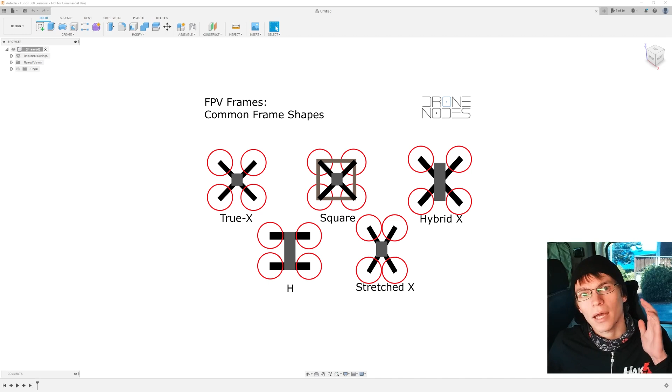So here we are in Fusion 360. First things first, we need to decide on what type of frame we want. There's a graphic on screen now from a site called Drone Nodes, and it shows square, true X, H, and all these other different drone shapes. It doesn't show the couple I'm actually interested in designing today, and that is something of a modified H. Actually, it's probably closer to an IX frame.

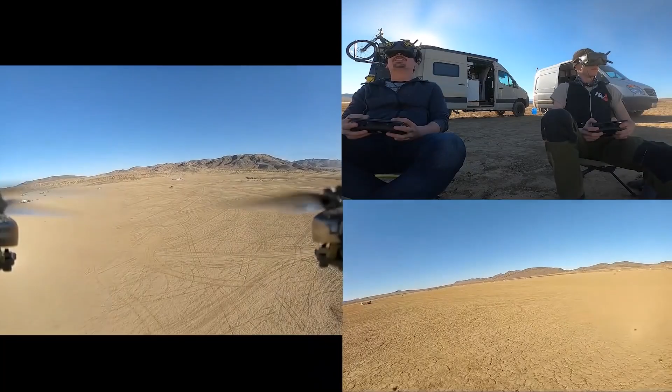Now, this design can be seen somewhat in the GEPRC Baby Croc that Darren and I did a shootout video on some time ago. You can see that here. If you look closely, it's almost straight across up top and has an X type of shape on the bottom. This allows us to mount our crossfire antennas straight across up front, and it also affects handling in some relatively good ways. The flight controller takes up a lot of the weirdness of various frame designs, so if you're wanting to try something strange, feel free, because odds are the flight controller will make it flyable.

The frame shape you choose really just comes down to what type of handling you want, and mostly personal preference. I personally really like this layout because it gives you a nice large center section to install all your parts to, with lots of room to work, and then the battery can go on top. So with the frame type chosen, we now need to figure out the distance between motors so that the props don't overlap or otherwise cause turbulence with each other. And we also need to figure out how big we want our center section to be, where all of our payload and everything's going to go.

This is going to be a relatively basic FPV drone, so we don't need a huge area. The GEPRC has a really long avionics section because it has a DJI Vista in there, as well as the flight controller, a GPS module, a high-definition camera, and all kinds of other relatively large components that we aren't dealing with. So obviously this drone's going to be a lot smaller.

One weird thing to keep in mind is the Zeus flight controller we're using is kind of meant for a 45-degree mount, which means it will be diamond shaped. If the drone's going this way, then the flight controller is going to basically be mounted like this rather than like this. You can offset this in the flight control software, which we'll get into in a couple videos from now. However, for simplicity's and reliability's sake, I'm going to mount it this way. I just wanted to make that note here because this flight controller probably wasn't ideal for this, but it's easy to get.

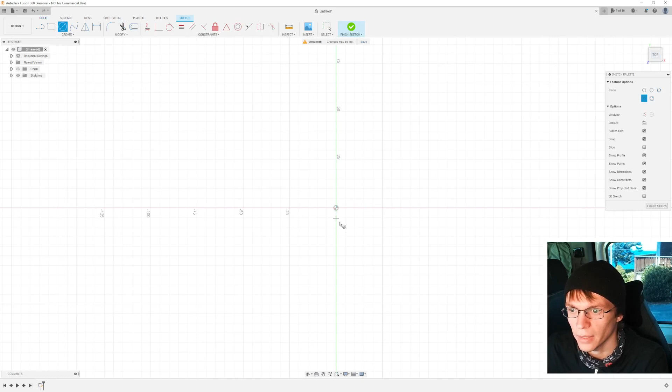In this case, these are going to be 70mm propellers. So we're going to go into our CAD program, select top here, and we're going to make a 70mm circle. And we're going to repeat that a few times for all of our props. Now we have basically the disc area of our props, and we can move those around and get a rough idea of how big our drone should be, what shape it should be, and so on.

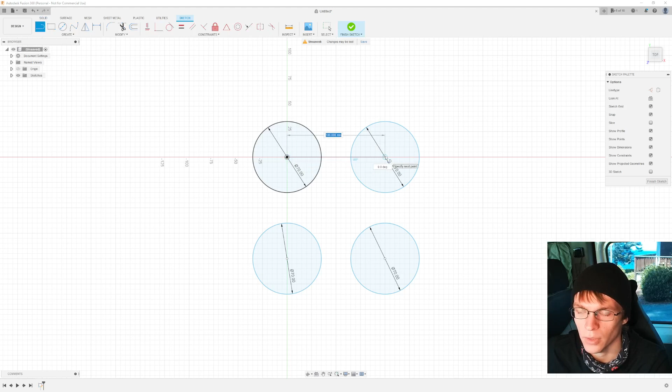Now the rule of thumb is you want roughly 1.5 prop diameters between the various center points of the motors. In this case, we have 100mm there and 100mm there. That also makes it square, which means our tuning for roll and pitch will be basically the same. Weight distribution can affect that somewhat, but with a square prop layout, we don't have more pitch authority than we do roll authority or vice versa.

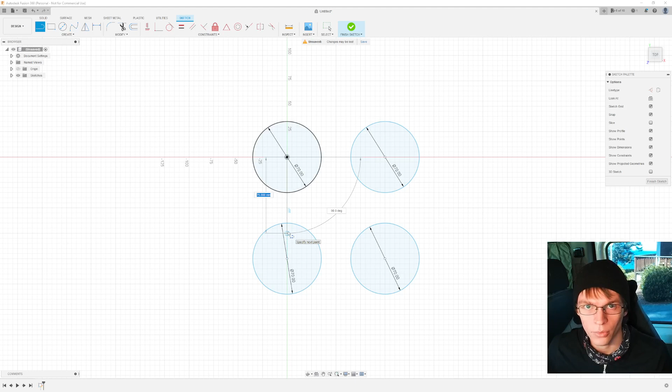It will be equal pitch and roll authority, which for beginners is a really good thing because the drone handles exactly as you'd predict it to without any extra tuning. Now, it's possible to build a longer drone that handles, you can turn down the pitch strength and so on, but that gets into a little more advanced stuff than we're looking to get into with this design.

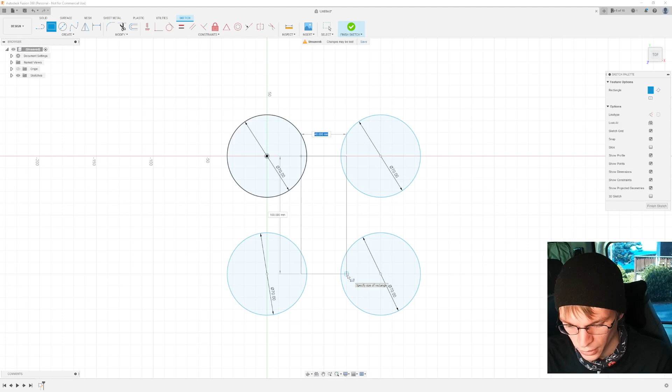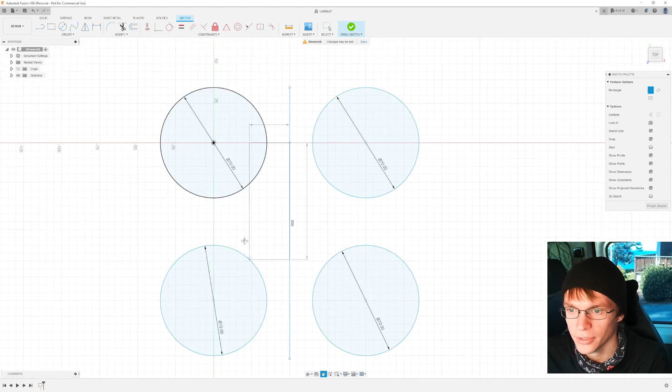Now, one trick we can actually do here to make our life a lot easier is to only design half of the drone. This saves a lot of issues with symmetry. Basically, we know we want this to be 42 millimeters wide, so I can just make this 21 millimeters wide, and then once I have the whole left side of the drone designed, I can go through and just clone the whole thing, arms and all, basically mirror it and make the other half. That way I'm doing half as much work for a full drone.

Now, it is acceptable to have the props overlapping the center chassis somewhat. This will affect your thrust output as well as cause more turbulence on the props. So for a high performance, perfectly tuned race drone, this isn't ideal. For a backyard flyer like we're designing today, it's fine. Now, you could always extend the arms another few millimeters up and out, and that would completely clear this, but it also makes the drone a bit bigger, a bit heavier, and so there are trade-offs there.

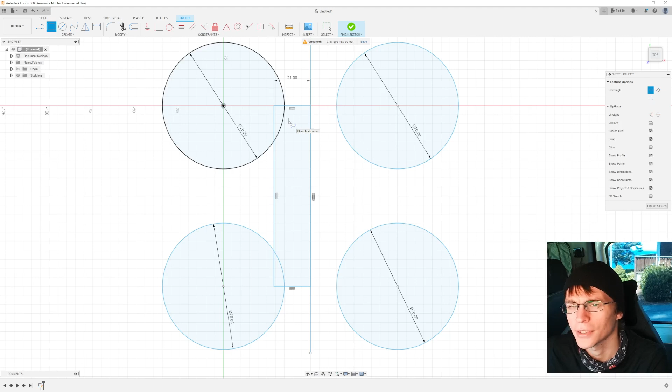Now, the next thing we want to do is make the rough layout of our arm. We know the motors have a 14 millimeter mounting foot, so I'm going to make the arms roughly 16 millimeters. Now, the great thing about the drone we're designing today is we don't have to be super worried about snapping arms from pure thrust. This drone's light enough that it could probably handle a couple of crashes too without snapping arms.

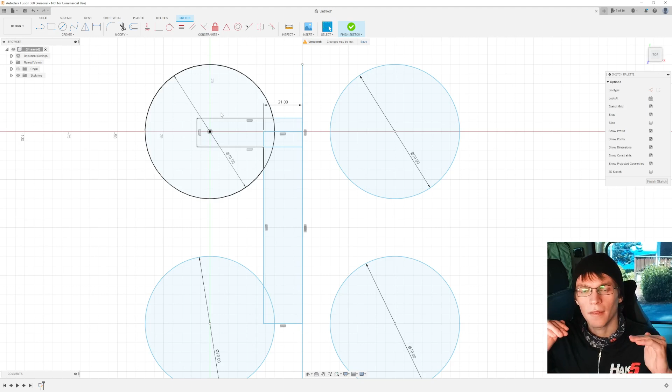However, drones I've designed in the past would actually break their arms purely from thrust because they generated A, so much thrust, and B, the center sections were so heavy that the motor basically levered the arm over and caused it to snap midair. Part of that was I was using PLA back then, and we're going to be using PETG plastic today, which is tougher, a little more flexible, and is still easy to print.

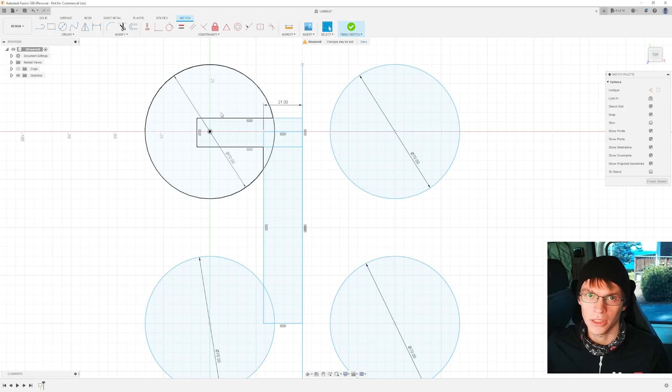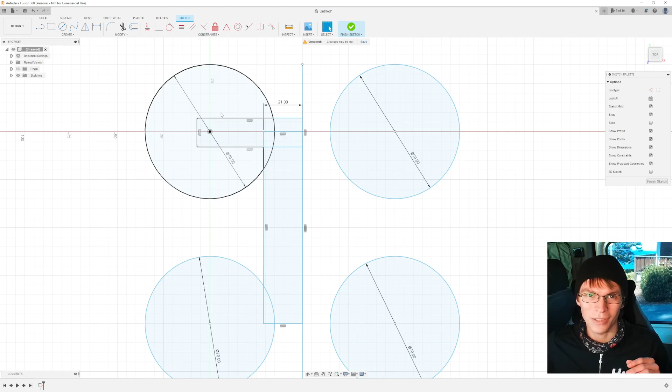ABS I found to be one of the ideal filaments for designing drones because it was fairly flexible, which sounds like a bad thing. However, for crashes and absorbing impulses like full throttle bursts, it handled a lot better and you could get away with a much thinner frame. Today, this frame's going to have to be thick enough that our screws don't go through our motor windings, which I'll touch on in a little bit. And that alone is going to provide enough strength at the voltages and thrust and everything we're running that it will make it a non-issue.

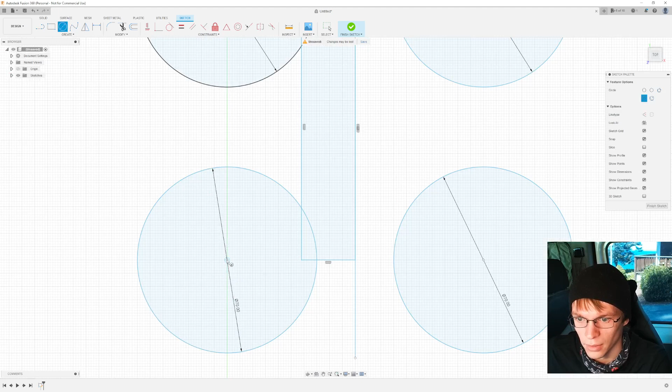We're not super worried about how thick the frame needs to be. Next thing, we're going to design our diagonal arms in the rear. This one gets a little trickier. To make my life easier, I'm going to go through here, double check this. Oh, I need to fix that.

Now I'm going to use a trick here to design these diagonal arms. First, I'm going to check my measurements up here. That's a 14 millimeter circle. I'm going to go down here and make another 14 millimeter circle. But I'm also going to put a 14 millimeter circle. And all of this is relatively arbitrary. I'm not basing these measurements on anything other than gut feeling and the size of the various hardware I'm using.

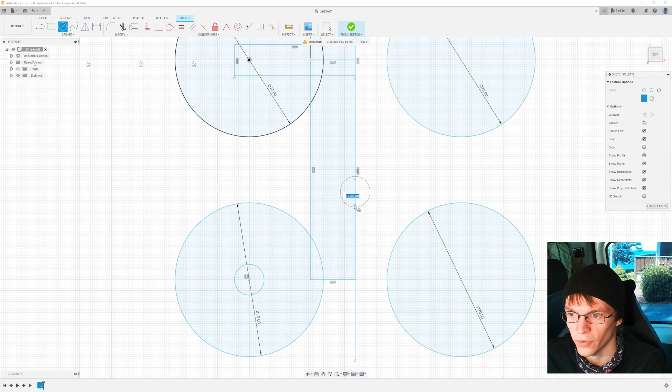And I can get away with that because, like I said, this is a relatively forgiving drone design, and I'm designing it on what I think I want it to look like. Modern flight controllers are so adaptable that you really don't have to put a load of thought into the design of the frame because the flight controller makes up for so much of it.

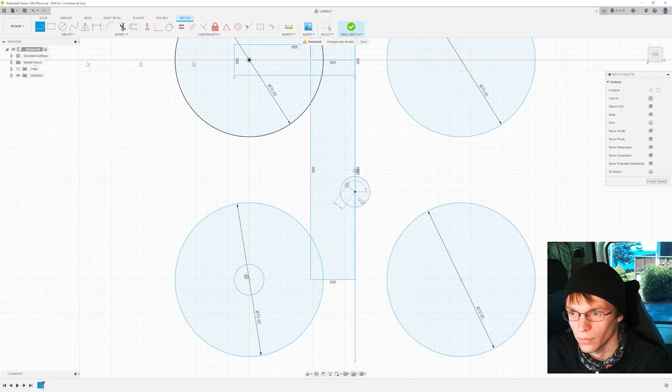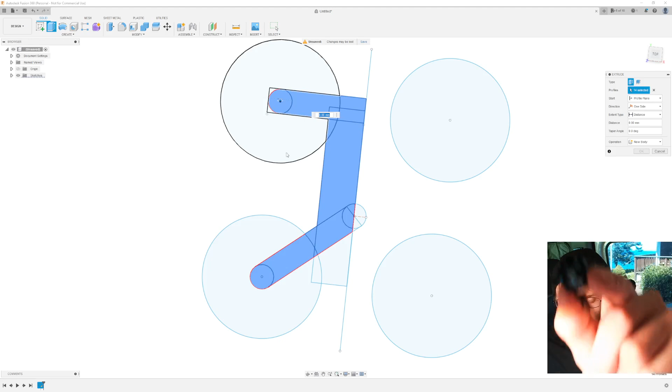So we're going to go ahead and extrude the base part of our frame and adjust it a bit more as we go. We actually don't need those parts because those are going to get mirrored. Now, real quick before I actually run this extrusion, like I was saying earlier, one thing to be wary of is when you're screwing the screw into the motor. I'm not really sure how well you can see that, but it's possible for the screw to go through the footing and continue into the motor windings, causing them damage and to short them out.

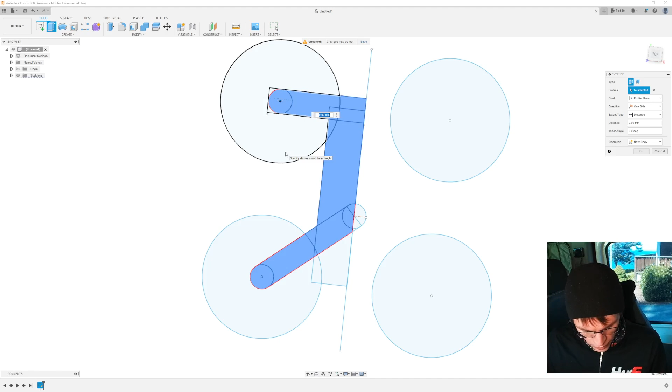So we want to make sure our frame is thick enough that we don't need to use washers or anything, because we'd rather have a thicker frame than be using backing washers to make up that space. So in our case, we need the frame to be at most 3 millimeters thick. Anything more than that, actually, and we'll need to use longer screws and so on and so forth. But I want to use the screws included with the motors because I don't want you to order new screws. So we're going to go with a 2.9 millimeter.

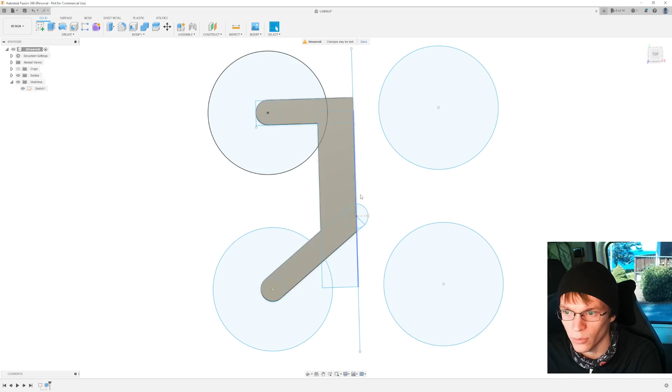Once we actually get our component layout figured out, we can hollow out a bunch of this, basically how the GEPRC did, and that's carbon fiber. We can go through and make speed holes and all that, and that will considerably lighten our frame design.

One other neat thing about 3D printing, and we'll touch on this more in the next video when we actually print our frame, with 3D printing, we can make parts that aren't solid. So this actually has an advantage over traditional drone design. Like that carbon fiber I just showed you, we wouldn't necessarily need to make our speed holes all the way through the drone. We can use less infill or thicker walls and so on to save weight and adjust our strength where we want it.

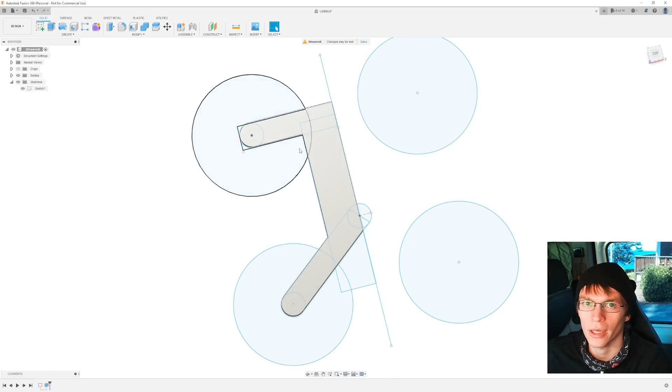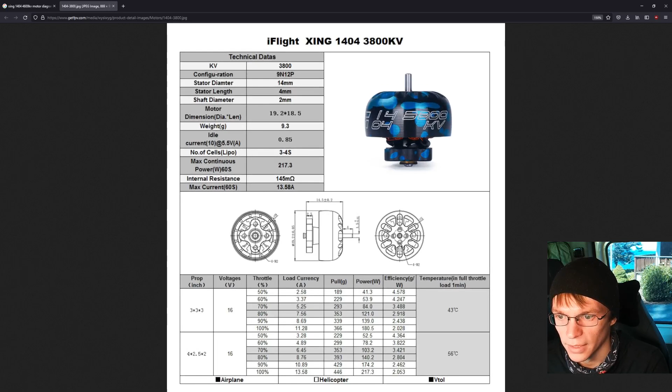Now the next step is to design our motor holes. Now we could sit here and measure the footing of the motor here and go through all that, or we could just look up the part diagram. So in our case, it is a XING 1404 4600 kV motor. Most drone parts come with a layout like this. We can go here and we know our bolt pattern looks like 9 millimeters in diameter and it uses 4 M2 screws. So we will do 9. We know it uses 4 screws in a perfect X configuration.

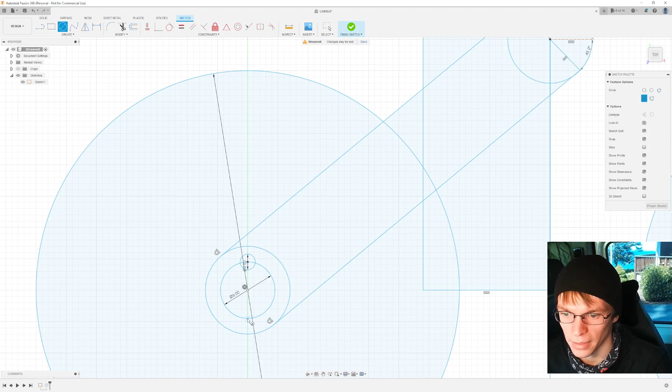Now, one thing about 3D printing is it never recreates holes perfectly because the material over extrudes a bit. So I'll oversize the holes by usually 25% or something like that, depending on the size of the screw. So these 2 millimeter screws are going to be getting 2.5 millimeter holes, and odds are they'll still need to be drilled out somewhat. And you can see I did that in a relatively 45-degree angle, so the cable will actually run up the arm.

And then up here, we'll do that same thing, but I'm going to give myself some guides. So that's 135, and we know it needs to be 9 millimeters, so we'll go 4.5.

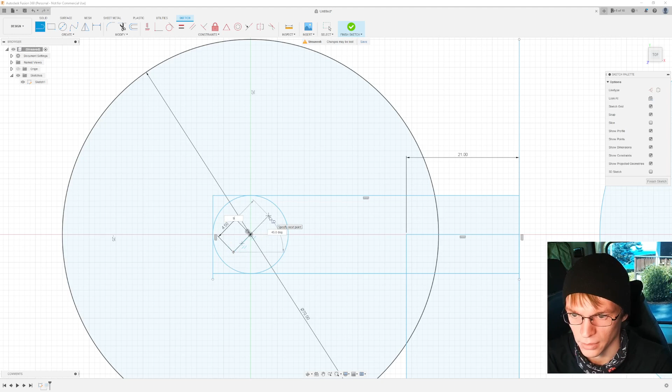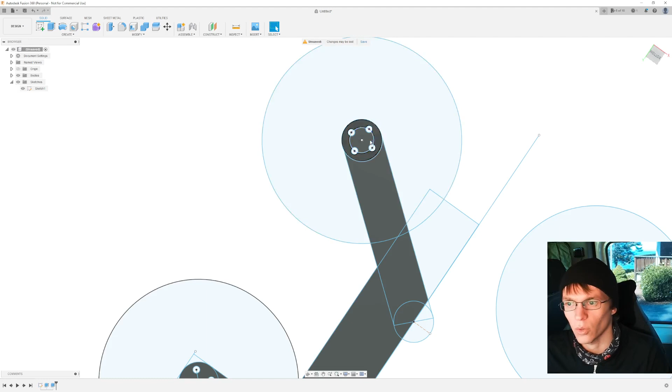We'll go up here, and we'll do that as a 9. And then, again, we'll go this way. Now, one thing I forgot to add here that we need to do real quick is pretty much every motor has a center hub with a lock washer on it. And that lock washer needs to have a relief hole cut in the frame, or else it will get squished and basically seize up the motor, and you can burn out motors exceptionally quickly.

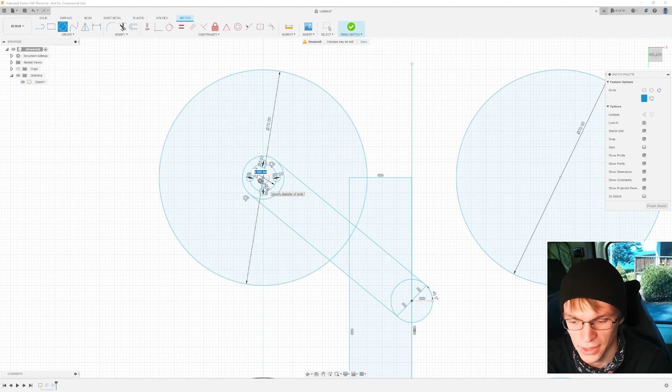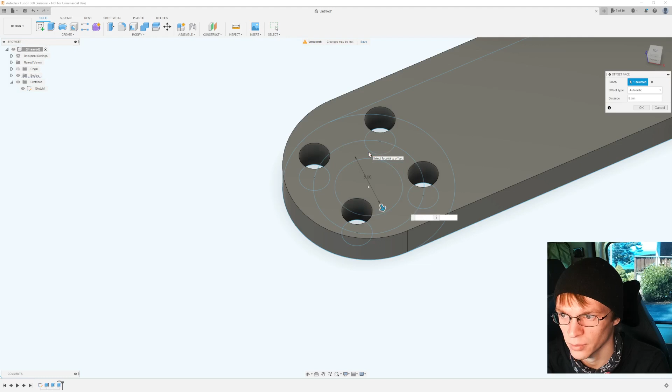So in our case, we need to measure this. And it looks like the bearing is about 5 millimeters in diameter. As I said, we're going to make that about 6, we'll go 5.5. 3D printed holes are pretty much never the size you design them at. Now you can see there is actually a little concern here on how little material is between this. And so I think I'm going to actually go ahead and take my chances and bring that in about 1 millimeter in diameter. I would rather have a little more material there, and I can always drill it out later.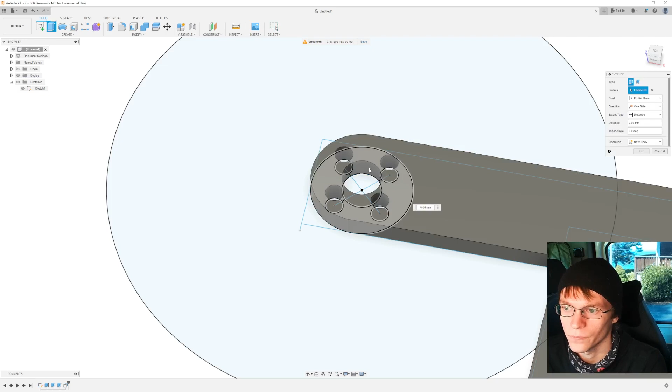That's one thing about 3D printing. As with most methods, it's easier to take away material so that you don't need to reprint an entire frame. So with this change, if it is actually too tight for that center washer I was talking about, we can go back later with a drill bit and drill it out instead of having to 3D print a whole new frame because we made it too big and then ended up snapping an arm or whichever.

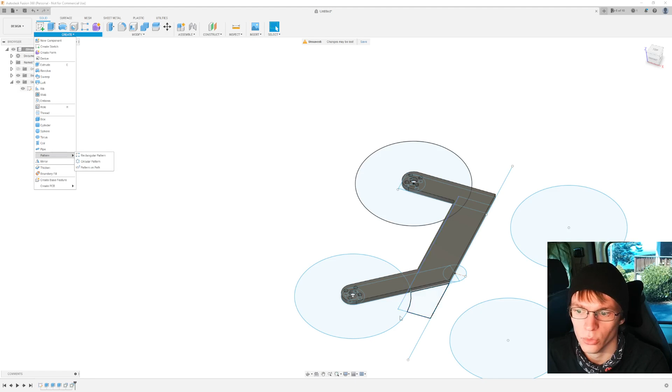One thing to mention is you can use this pattern tool. Probably not rectangular pattern. Where is it? Yeah, you can use the circular pattern tool to do what I just did here. But I find for these 4 motor holes, it's easier to just do it by hand instead of using the pattern tool. If it was more than 4 holes, I'd probably use the pattern tool. It just takes a little bit of setup.

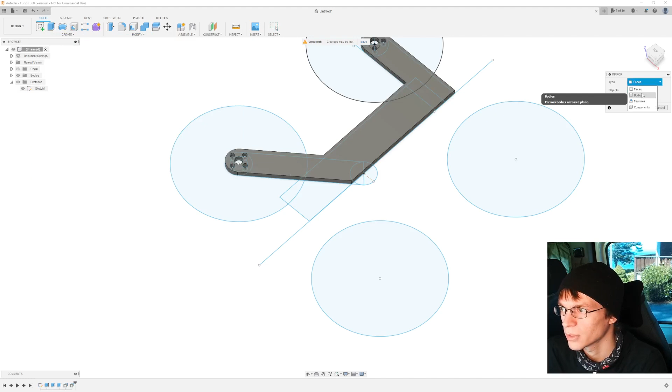Now, real quick, we're going to mirror this, as I was saying before. We want to mirror the body across this plane. We want it to join it. You hit OK, and boom, drone. Now, that is a very wide center section. Let me check my measurements on this. Yep, 42 millimeter. Okay. You can kind of start to see what our drone's going to look like here.

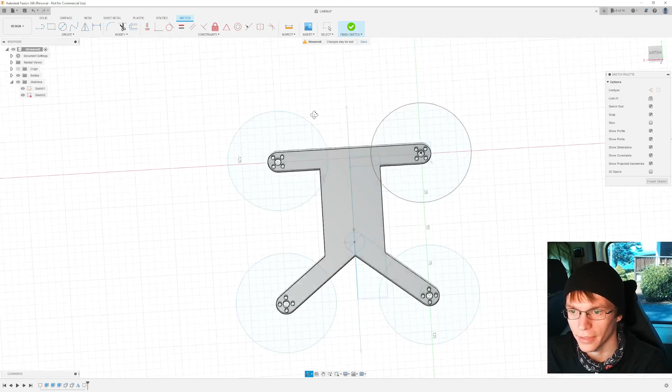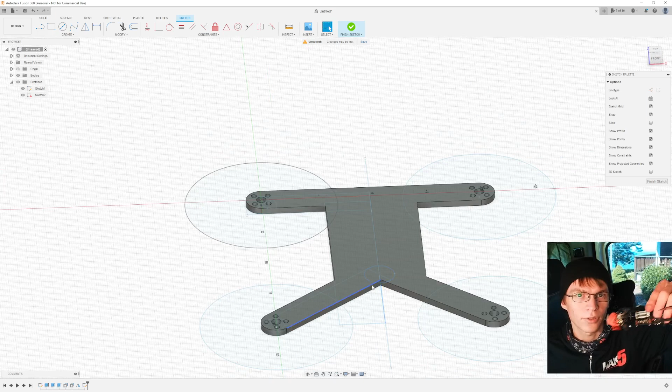Now, we want the bottom of the drone to be as flat as possible so that we don't have to use support material or anything when we're printing. And so we're going to leave the bottom untouched. So any kind of stiffening or cable guides or anything, we'll do across the top of the drone. Now, I'm going to make this drone very simple. A lot of drones have a top deck that adds extra stiffness and so on, and that's something we could add later. However, I want to make this just basically a flat plate. I want to print one piece and have our drone frame. I don't want multiple parts that need to be assembled and so on.

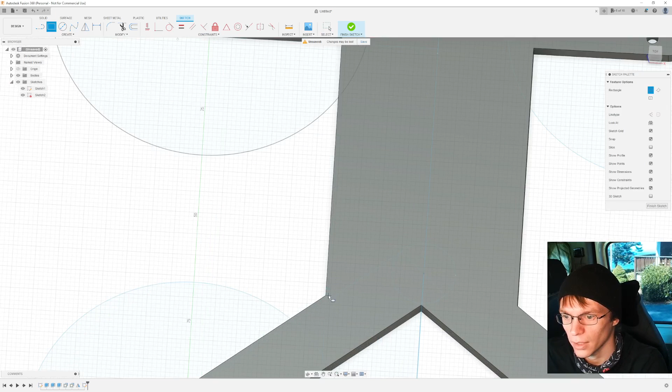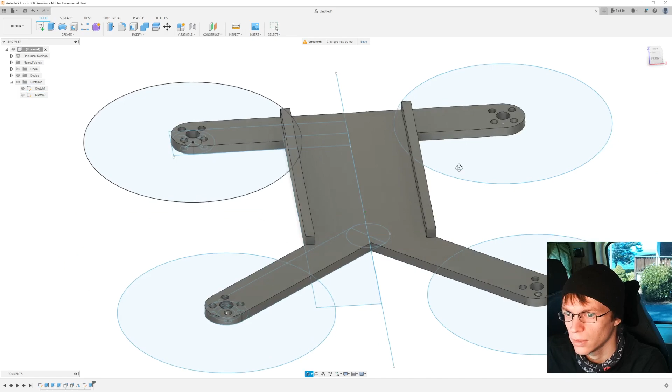And so to get that rigidity and stiffness I need, I'm going to actually go through and right along the edge here, I'm going to put some pieces like this. I'm just kind of eyeballing these. And this will give us rigidity in the long axis here. We'll bring those up about 3 millimeters as well. And then I'm going to give us some cable guides. Now again, one trick we can use so that we don't have to do this work twice, instead of just extruding it through here, we can actually extrude it all the way through the other side. And that gives us our perfectly matched cable run.

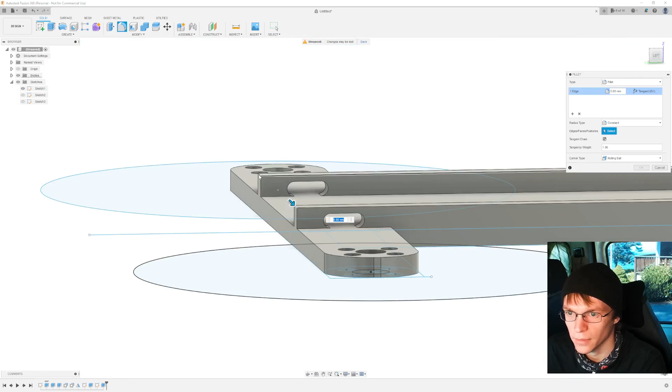Now while we're up here, I'm going to fillet the front of these. Now obviously the rear doesn't need those same cable guides because these stiffening arms don't extend that far. I do think I want to extend these a little further though. And again, we will just fillet that. Now, something we can play with as we actually flight test this drone is dog bone, like bringing in the arms right around here to reduce material and also reduce the surface area of the arm so that less thrust is getting redirected and less turbulence being generated.

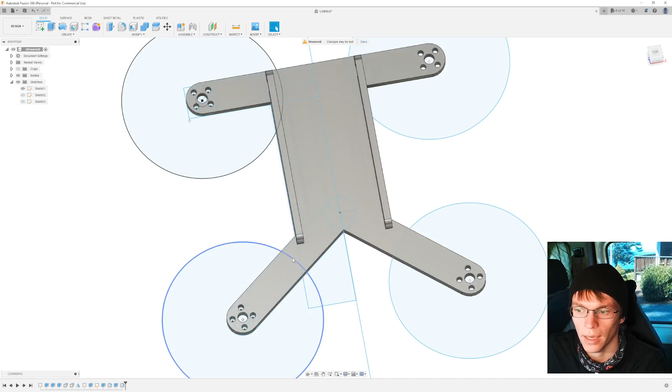And basically the thinner the arm, the more thrust goes past it rather than kind of swirling around there. However, I don't want to mess with that right now because I'd rather have too thick of an arm than too thin of an arm that will break.

And that's the great thing about 3D printed drones is we can revise our design and improve it as we go. When we break something, we make that a little stronger. When we think we want to reduce some material and make it lighter, we can do that as well. And again, odds are, if I really wanted to, I could take out probably a good 3 mil on either side of this and just run a single stiffening joint down the middle. And I'd have a stronger arm than just this flat piece of plastic.

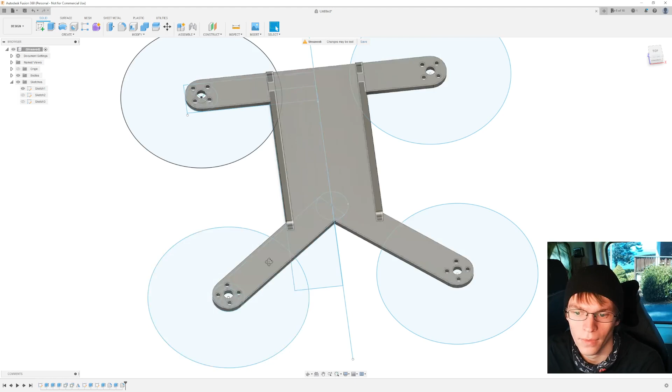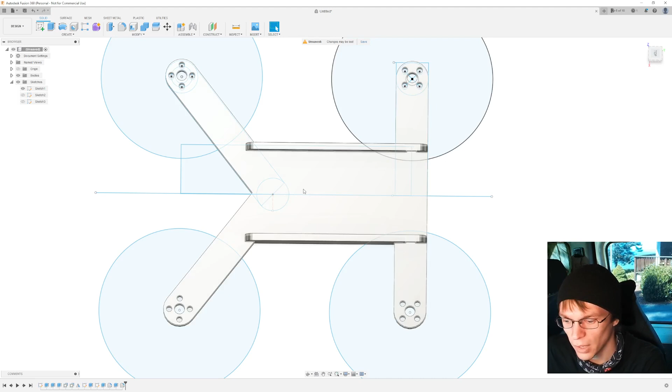Next up, we're going to take some measurements for the flight controller. It looks like it uses a hole pattern of about 35 by 35. And we want our flight controller to be as centered as possible. Again, modern flight controller software has gotten really good, so you could bias it towards the front or towards the rear and adjust for it in software. But I'm trying to minimize how much tuning we need to do. So we're going to put it roughly center. So right about here. And that's the center of the props rather than necessarily the center of the frame.

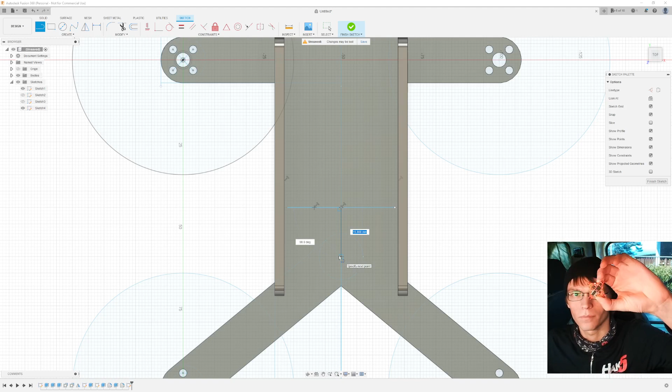So I said the holes are 35 millimeter. So off center, we're going to go. Now it is unfortunate that I chose a flight controller that is an X shape. It does make this a little silly. It is not an ideal use of space, and the center of this drone could be much narrower if you used a flight controller like this. Like I said, you could also adjust it in software, but I'm trying to avoid that. And again, we will make a 2.5 millimeter hole in all 4 of these.

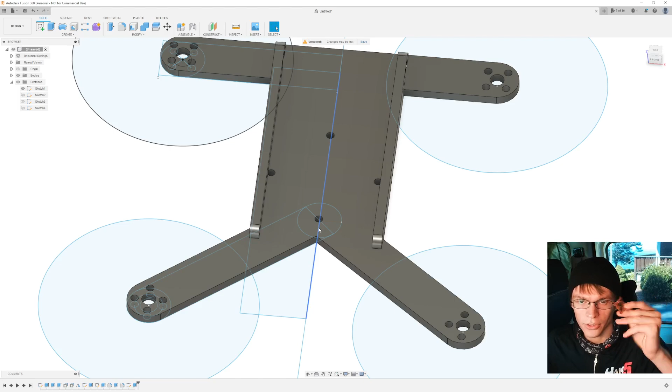Now, another quirk of this flight controller is it has a USB port sticking vertically out of it rather than an edge. And so we need to account for that and make a hole for it to go through the bottom. I don't want it sticking up through the top because it's possible it'll get sheared off. If it's aiming down, it will get less obstructed. Also, all of our motor solder pads are on the top, and I want those to be easily accessible. And again, I don't want to have to change the orientation of the flight controller in software any. So I'm going to give a fairly large relief here.

If it's not clear, I've taken no professional courses on designing in Fusion 360. It's something I kind of taught myself, and I'm sure a lot of what I'm doing here is not ideal or not correct. But this isn't a Fusion 360 tutorial, this is a drone design tutorial, which I'm going to say makes it okay. And again, we're going to add some nice little round bits here just because I don't like sharp corners.

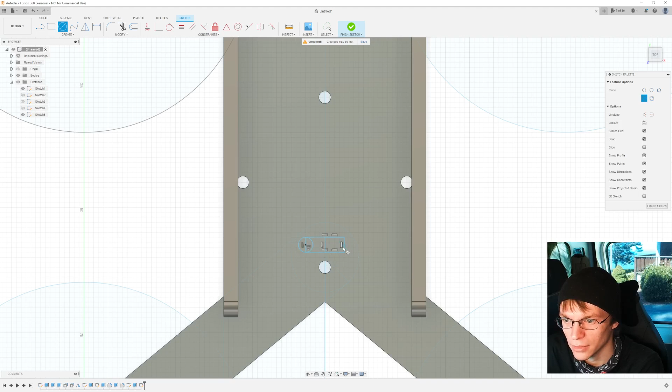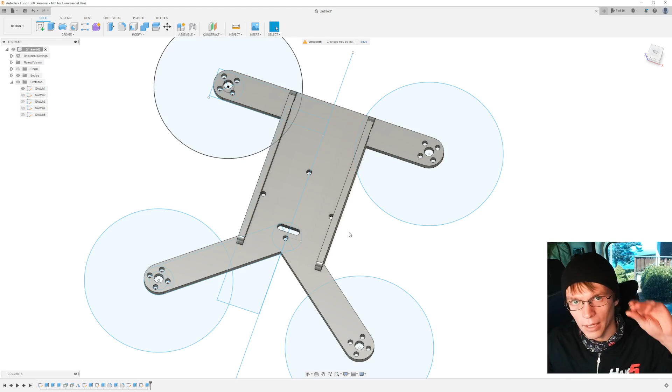Alrighty, I think that's all we need to do for the flight controller, which also covers our VTX because the VTX mounts across the flight controller. I really like this setup. It's one less thing I have to account for. We do need a place for our receiver. A lot of drones will just throw the receiver wherever with some double-sided tape, and that's absolutely an option here. And then that leaves our camera as well.

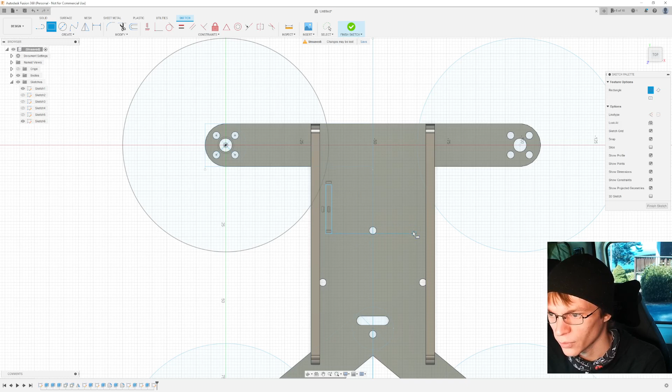Oh, and we also need to cut some slots for the battery strap. Like I said, we're not going to design a top deck for this at the moment. So we're going to be putting the battery on this drone on the bottom. And so the easiest way to do that is to just go in here, and we'll add the Velcro strap later, and that will just hold our battery on the bottom right here.

Next up is the camera mount. Our camera is right at 14 millimeters wide, so we'll probably do a 16 millimeter gap, and we can use spacers.

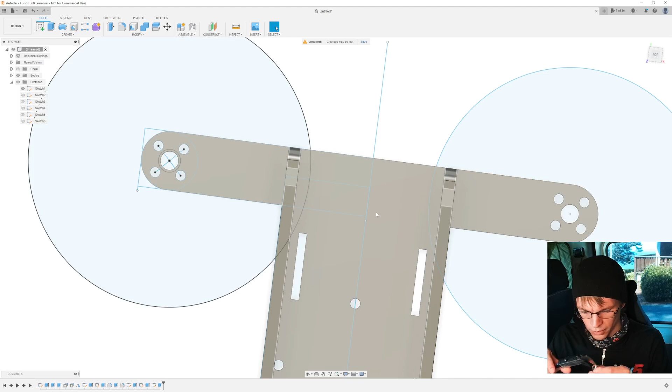And it's 15 millimeters tall, so we'll need the camera mount to come up at least 8 millimeters. And we do want it to be protected by the front of the frame somewhat, so we'll bring it back. Going to use the center line here to make it symmetrical. So we'll bring this out 2 millimeters.

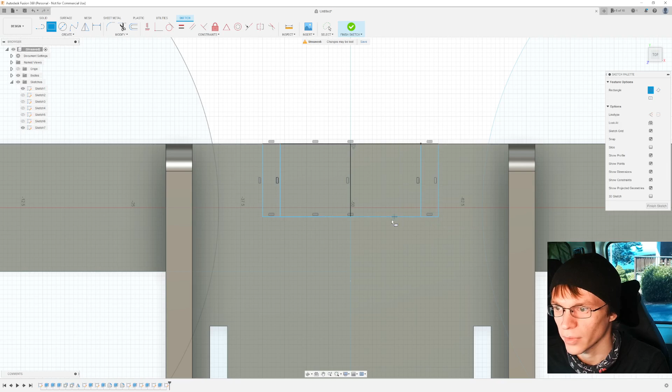Now the one unfortunate thing here is we're going to be working against the layer lines of the 3D print. And so this camera mount probably is not going to be the strongest thing in the world. We can make up for that a little bit with thickness and some fillet joints. So we will do that.

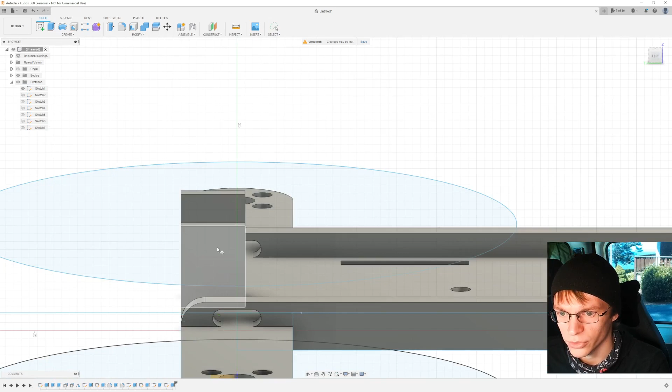We only need it to be about 10 tall, because the mounting holes are going to go at 8 millimeters. I want this to come down a little further because I have to account for half of the mounting screw hole. And as we did before, we're going to punch that through both of them so we don't have to repeat our work.

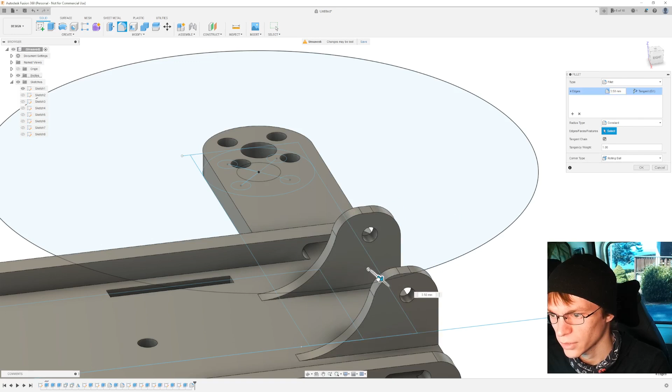Next, we're going to pull some fillets here to increase the rigidity of this mount a little bit. It's probably excessive, but do this just to clean up those sharp corners. And we're also going to do this out here. I think that's it. We just designed a drone chassis, more or less. Now you can go through and clean some other things up.

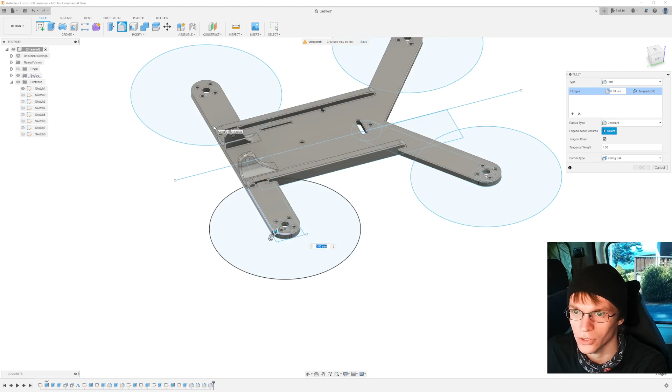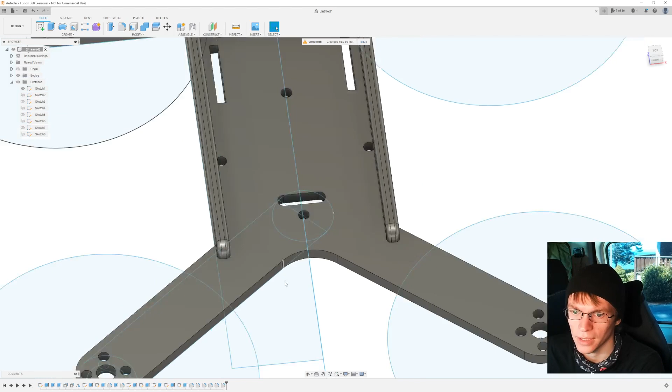Like if we wanted to make it look a little more pro, we could go through and fillet all of these joints. I do think I'm going to fillet these top ones, just because. And I'll probably also bring this. Anywhere you have sharp corners, there's going to be stress concentrations. So just keep that in mind. Fillets, while they look good, they also serve a practical purpose, in that they are relieving some stress, especially any time there's a lateral movement.

So if this arm caught on something like a crash or something like that, these fillet joints will take up a lot of stress rather than giving you stress marks. As someone who's crashed a lot of 3D printed drones, I've gotten pretty good at determining where the weak points would be.

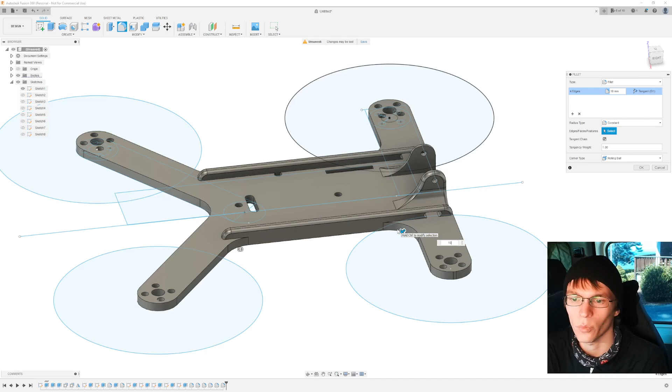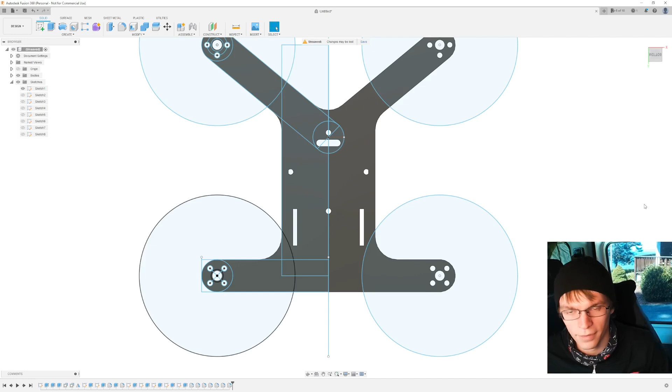And there we go. I think I will cut a couple of zip tie holes for our Crossfire. I want to use a hard mount Crossfire, or a rigid Crossfire antenna like GEPRC uses, rather than the lighter antennas, because I find that I chew up the lighter wire antennas way too often. So anytime I can make room for a rigid antenna, I want to use one.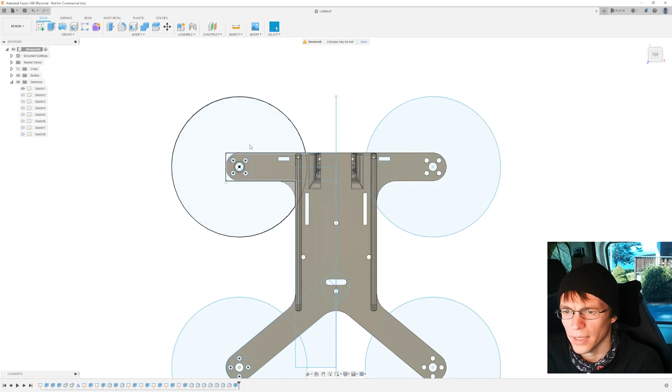Like I said, the battery is just going to be mounted with a strap across the bottom, and you can tell the bottom of our drone's completely flat, so it will fit on our printer. Now, one thing I didn't check, let's take a look at just how big this frame is. Look at that. It's 120 by 116, 117. So this will fit on the Monoprice Mini Select.

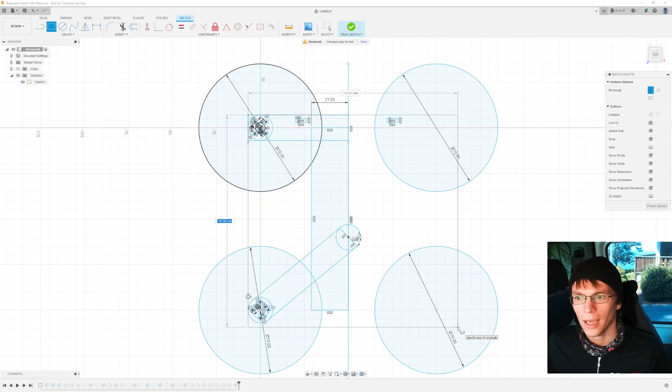Now I have bigger printers I'll be using, but I want to make this as accessible as possible, and the Monoprice Mini Select is a 120 by 120 millimeter build area, and that's common on a lot of budget and lower end printers. So this drone chassis will fit on the cheapest, simplest of printers. I'm pretty stoked about that, considering I didn't necessarily make that a design requirement. And there we have it. We're ready to go through and print this and assemble this.

In the next video, we're going to, like I said, print this out and start assembling all the hardware. And the video after that, we're going to go through some of the electrical documentation, talking about how to solder everything together, where everything goes, best practices. And then the video after that, we'll look at the Betaflight software we're going to be running on this drone and actually take it for a test flight.

Now I've got to figure out how to edit this. Editing a video on CAD software and keeping it interesting is going to be interesting. So I'll get back to you on that.